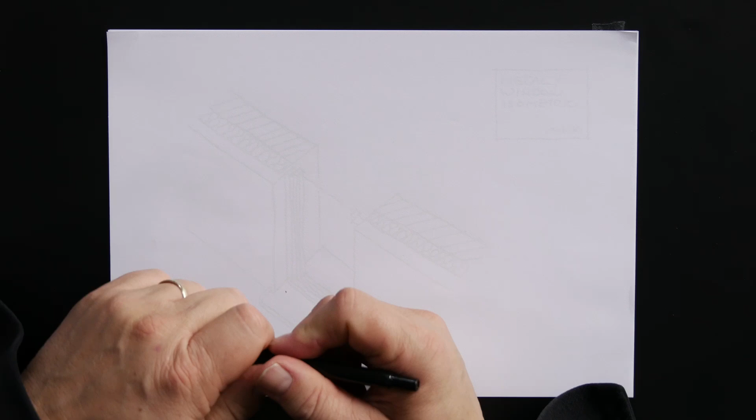So where are we? Who are you? Oh, we are in Politecnico di Milano on a rainy day, unfortunately, but it's fun. Also with a guest. We have your dog here, I think. It's now coming also to visit us. It's going to take a look.

Yes, please. So I'm Enrico. I am a professor here about buildings, and we can say that I'm quite interested in building physics. So that's why Professor Knaack wants to show me something. It's a surprise, but I will see what he wants to show.

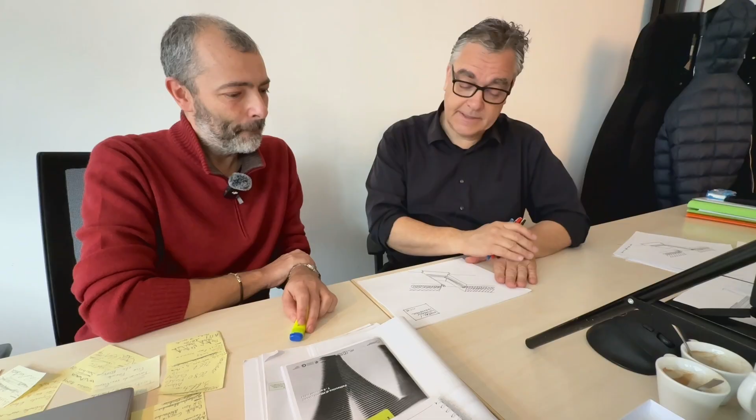Now, yeah, we designed this, and now I need to have expert comments to secure that our systems do work. Okay. And what we designed is a window ventilated metal cladding system. So we have a main wall with some metal cladding and a window being integrated. And I need to see if this building physics works well. You get the colors, you get the opportunity to correct where it's necessary.

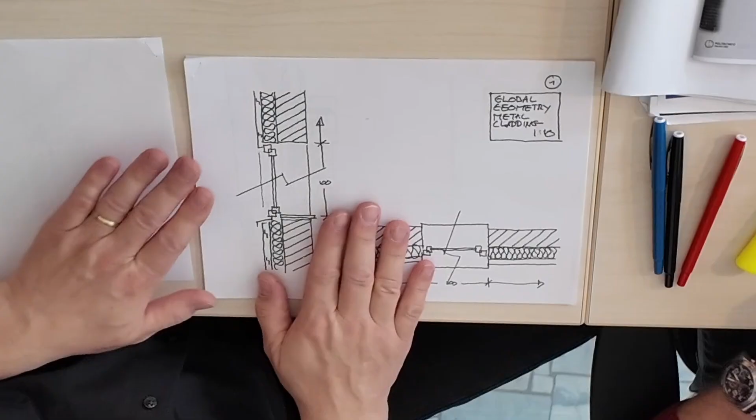And we started with this global geometry, floor plan, section. You see the windows being positioned somewhere close to the insulation. I hope we did that well. You need to comment. And then we go into details. These are 3 different materials. We have the aluminium, the wood, and the plastic version. I took them from the shelf, from the catalogs, and I'd like to see your comments on the systems.

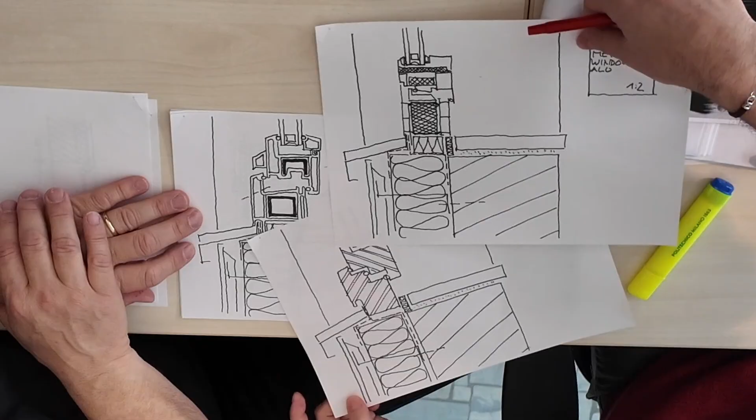Yes, it's quite interesting because I can see that, for example, in all the 3 drawings that we have here, the producer has highlighted some points. We can see here, here, here, and also here. We have gaskets that are really crucial for the air tightness, water tightness. We can talk about rain. And also, because of air tightness, they work really well in terms of thermal insulation, because if the air doesn't go from outside to inside, we are quite safe.

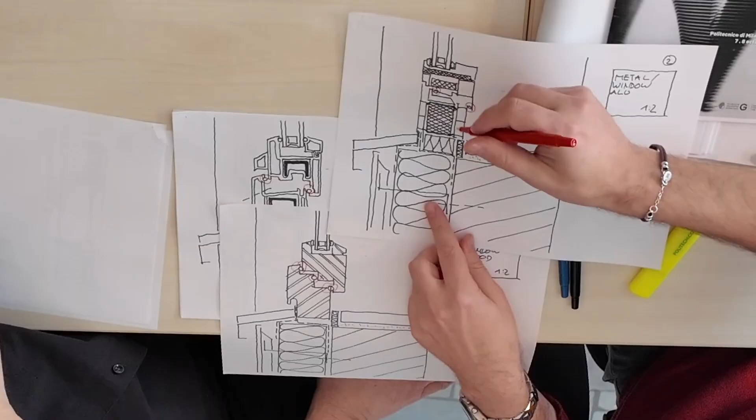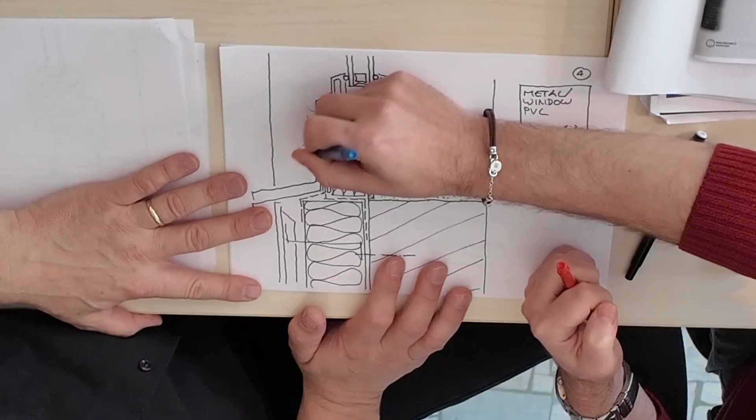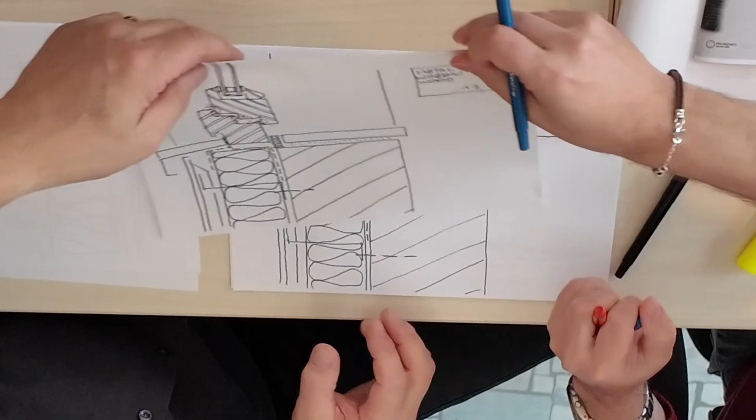But there are also different systems of windows. We can see that, for example, this is an open joint window, and so it's crucial because of the pressures in the different parts of the chambers. So water that can finally arrive in this gap can go out straight. So it's really a good solution, because if, for example, we take the wooden one where air tightness and water tightness are only related to the gasket, what happens if there is water and these are failing? Water is coming inside, and so the open joint is a really good solution.

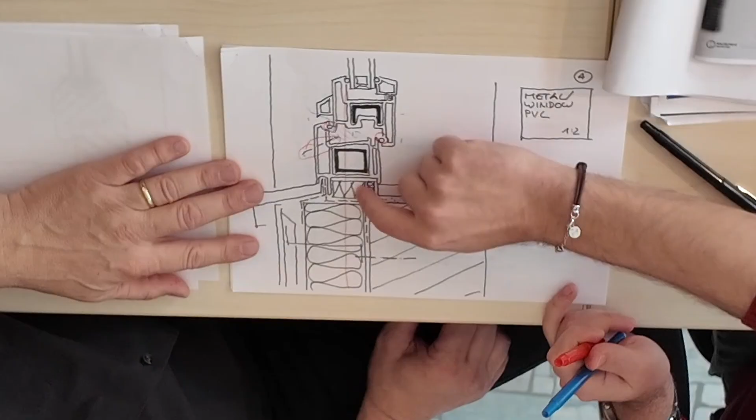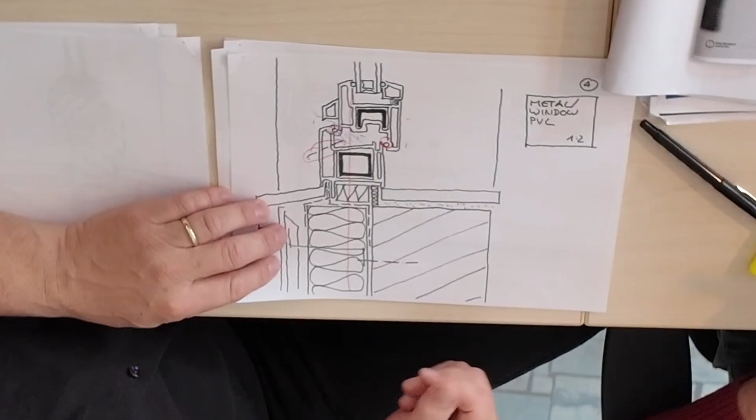We can also see that, for example, here we have a really good thermal line. So there is the thermal insulation of the wall that is in line with the thermal breaks of the window, and also with this special piece of insulation that I think you put because of the thermal bridge and because of air tightness and thermal control, right? This comes from the system of the window supplier. This comes from the system of the wall, and then this interface needs to be locked. Yes. And this is where you end up having a compressive band in position to secure it.

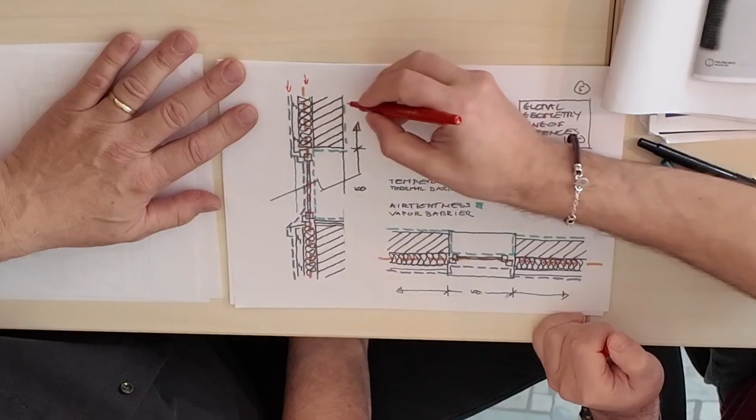Quite interesting. Now, this is for sure your topic. Yes, this is what you love. What I love, I work with this almost every day, and I see there are 3 different levels. One is related to water, one is related to the thermal control, and one is related to the vapor control. So this is crucial because, for example, in this way we can avoid any problem with condensation, especially if there is also a good thermal line.

And at the same time, we can say that all the 3 barriers should work really well, because if only one doesn't work, we failed. So it's not that we have 2 and so we are safe, but we need all 3 working in the proper way.

In the details later. Happy to see. Yeah. So this is vertical, this is horizontal section. Yes. You see that this finds its position. And now I'm digging into the details itself.

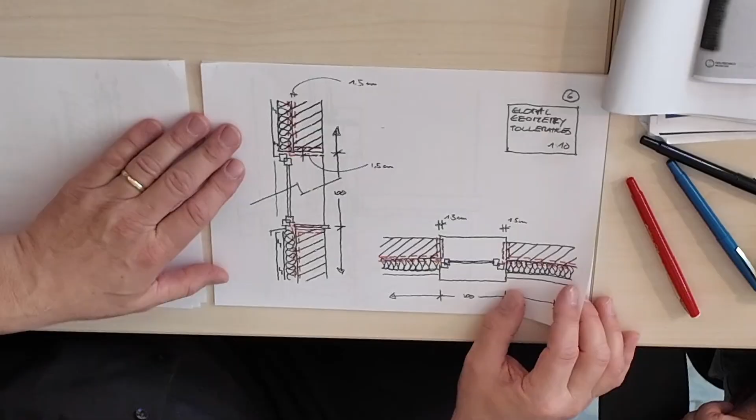No, first, tolerances. The tolerances are really important, because if you have these gaps too big or too small, it's not possible to have a proper barrier related to thermal, to air tightness, and also water. Which means if this is more than 3 centimeters, I may have a gap, and I'm not able to tape it, because tape is not made for a 3 or 4 centimeter gap. It's made for a 1.5, 2 centimeter gap. Yeah. Okay. So if you have something that is more, it doesn't work well.

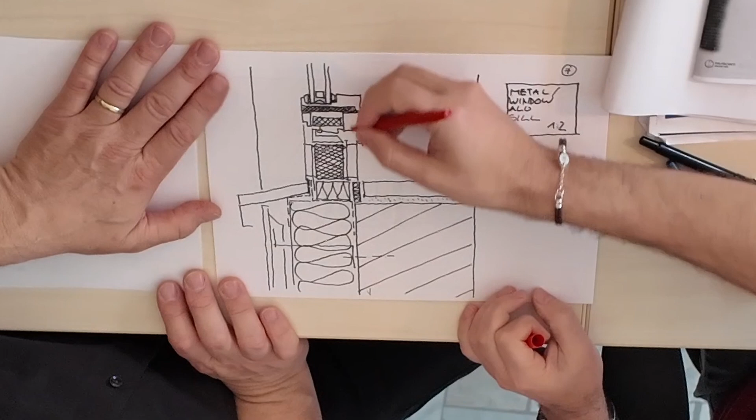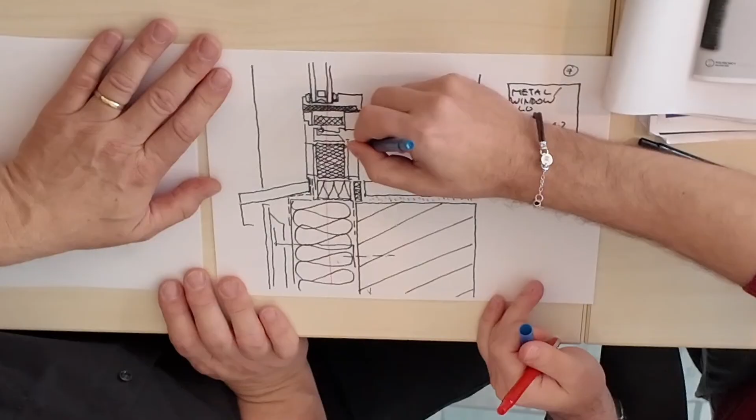Right, now the details. Lines of defense in such a detail. Did it work well? Yeah, we can see, for example, the thermal one is really well done. So thermal break here, thermal insulation here, and this is another thermal insulation piece that can work really well. What about water tightness? If we consider that this works only with 2 gaskets, if these 2 gaskets are fine and well maintained, because in time gaskets can stop working properly, so we have to check periodically if they are good or not.

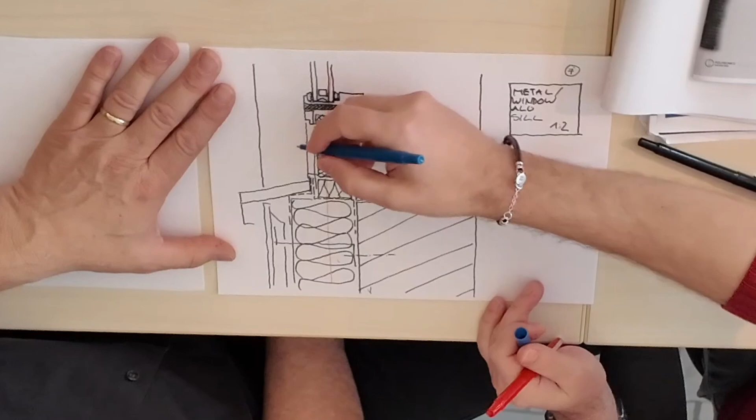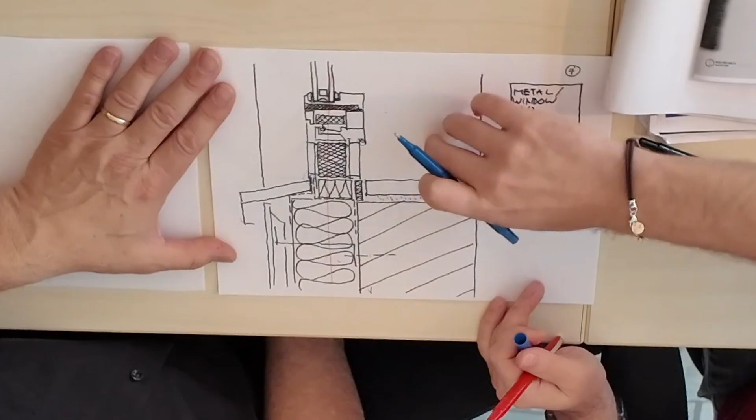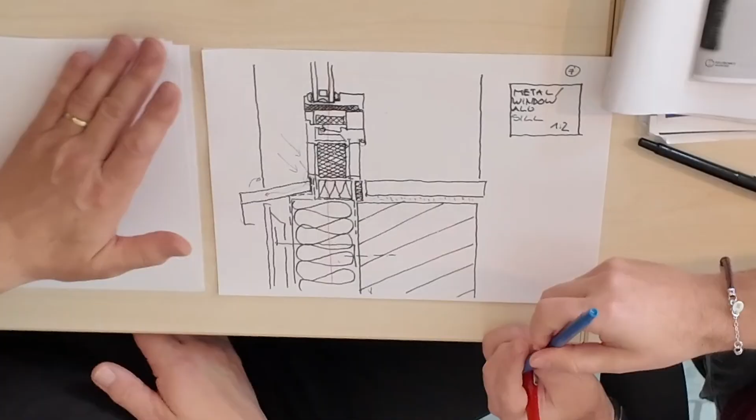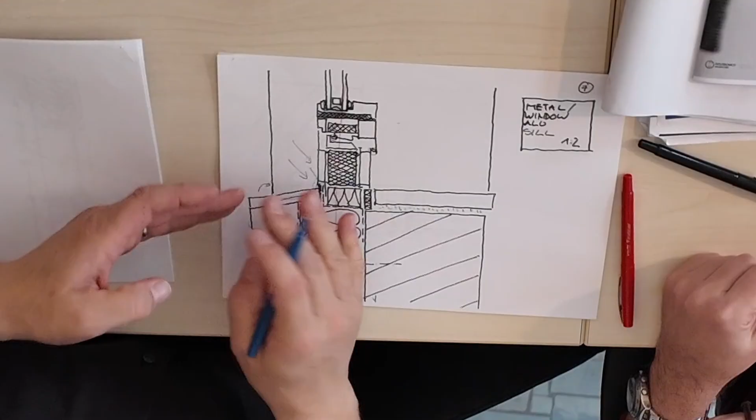The critical point can be here, for example, because here you have a metal sheet that is correct, it goes under the frame of the window, so in this case water coming here can go away and not inside. But we should also consider what happens on the side, because sometimes it's easy to work on the horizontal, but we should also... This is how I envisioned it. So we have drainage here, but we also have the window sill getting below the metal sheet, which means it's supposed to be actually like this. So that's getting at the back. So this is the right sides and right shape of this metal sheet.

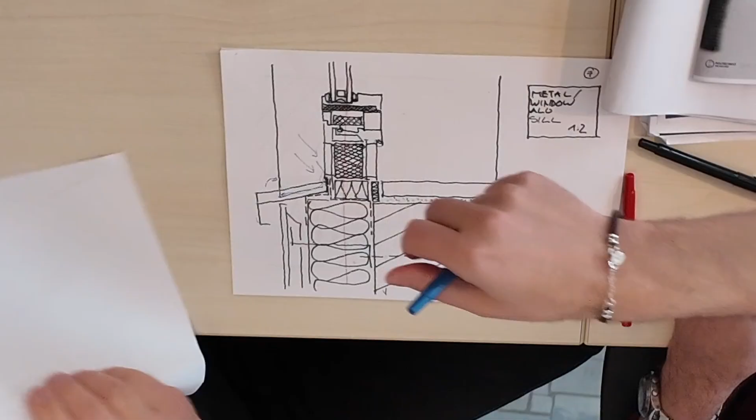And if you go back to the other detail, I see that also here it's really interesting because the metal sheet is going vertical, and it's also good because here you can have dust, and when it rains, if you don't have this, all the dust can go on the facade and mark it. Yes, marks. So this is really well done. Okay, thank you. Okay, this is the vertical one. Now we go to the horizontal one.

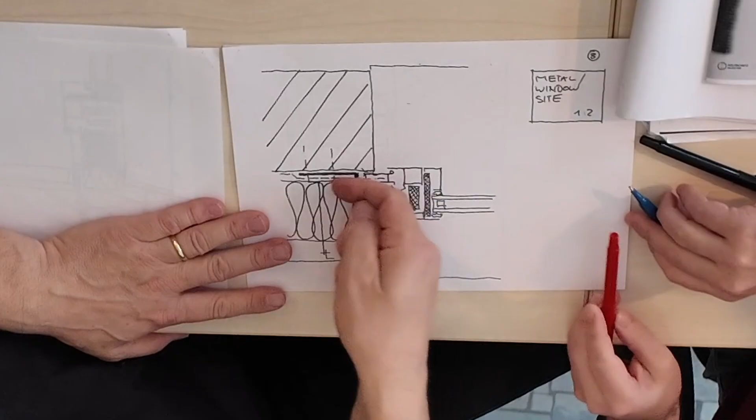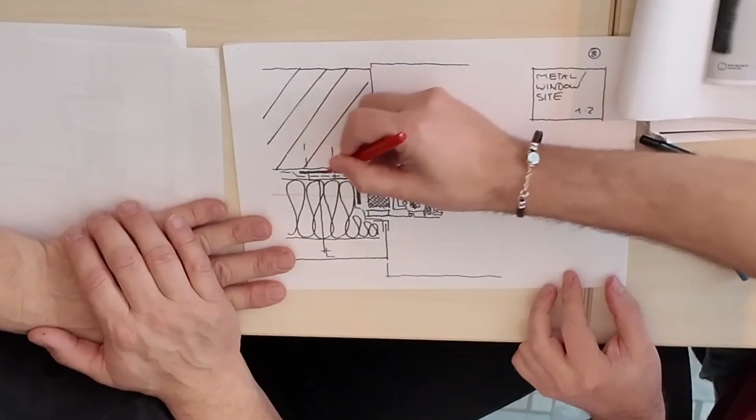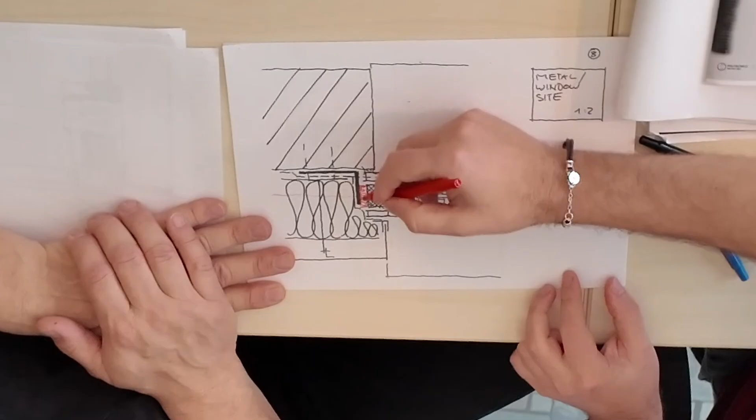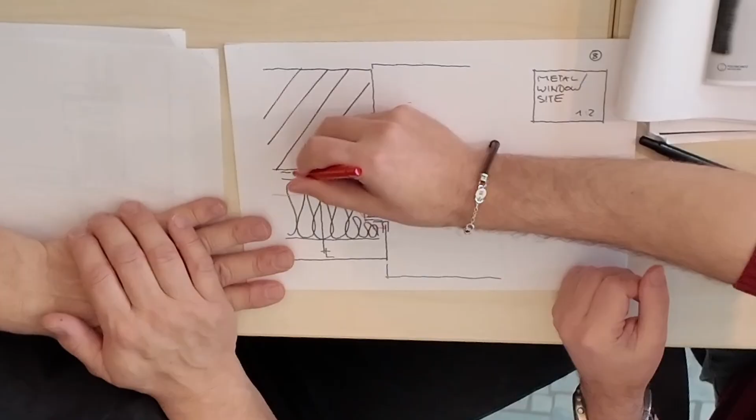This is where I need to fix the window with these brackets, 2 screws, 1 screw from the aluminium system, and now I need to seal that whole thing. Yeah, for thermal we are quite fine, except that I can't see anything between this metal sheet and the window frame. So here you would actually like to add some tape that can be compressed and also fill the gap. And this is also good to control the vapor migration from inside to the outside, because this is our vapor barrier. But what happens here if I don't have...

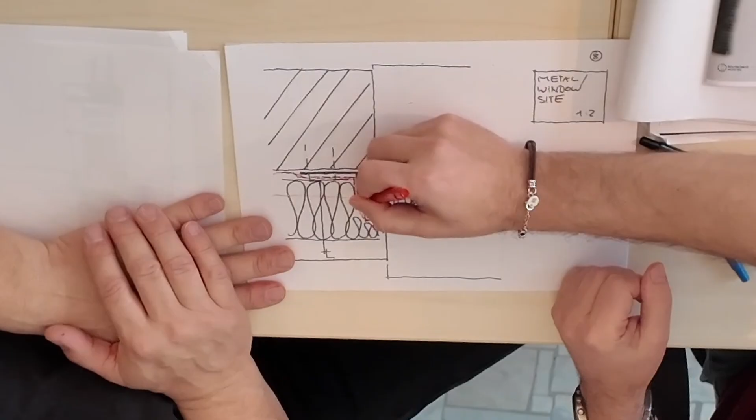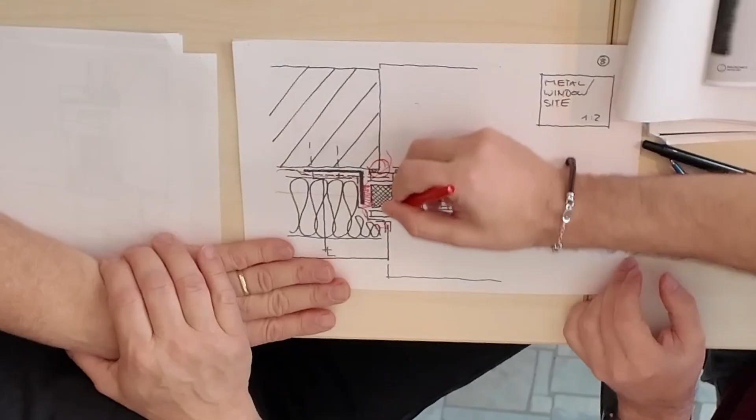If the dew point is too low... It is too low and this is not working properly, I can have condensation here. So that's why I need to insulate. And we have this sealant in an important position. Yeah. Okay. This sealant, and then we should also consider what happens here. Because this I can see is a metal sheet, and here you have this tape that goes on the frame, metal, and then you have this.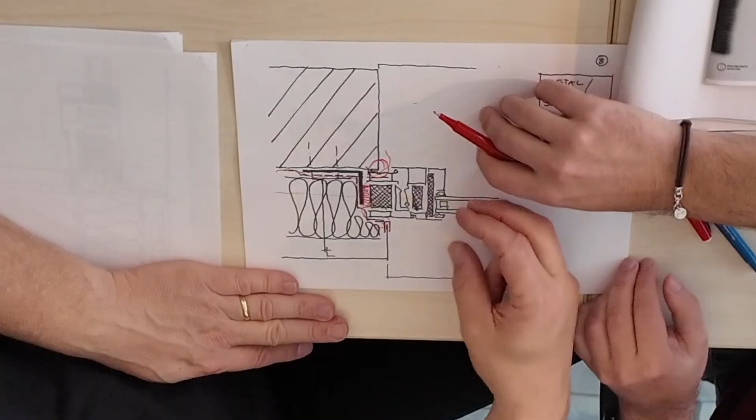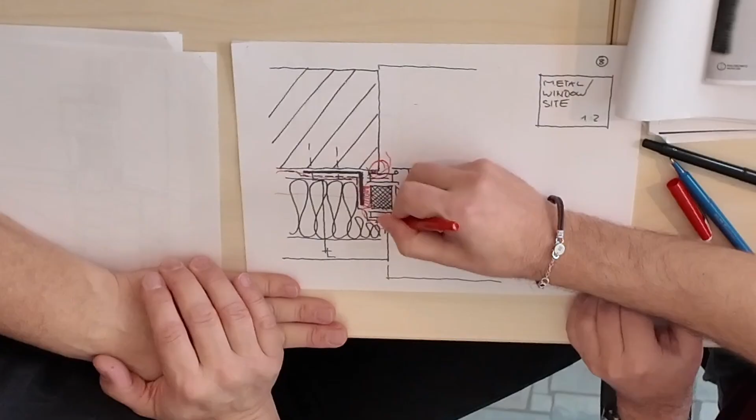And then there's this L-shaped bar fixed to the aluminium system, which then covers that one. So I envision the window is brought into position, then I tape it, then I close it with insulation, and then I close it with... So this is something that goes here, fixed here. Fixed there. Consider that if you fix it, then you have some points where your vapor barrier has a hole.

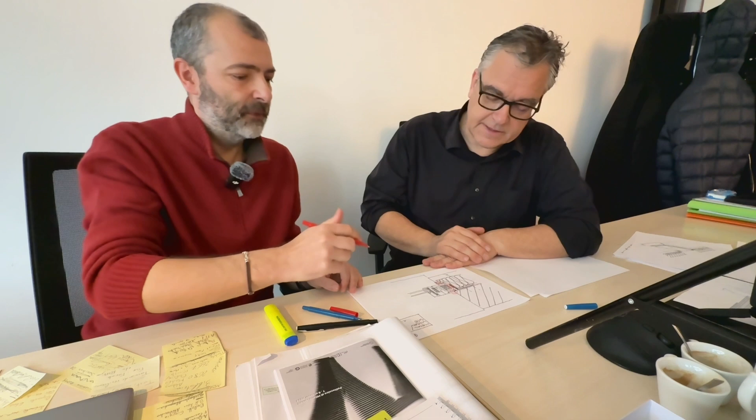True, but then the inner aluminium system closes. Yes, that's necessary. Okay. Now we go to the top part. It's the same detail, same system, same kind of sealant. Yeah, I can see, for example, here also we have always this, that is a good sealant.

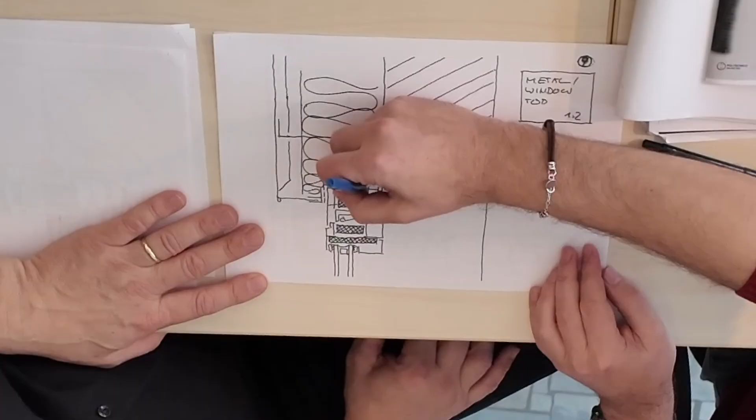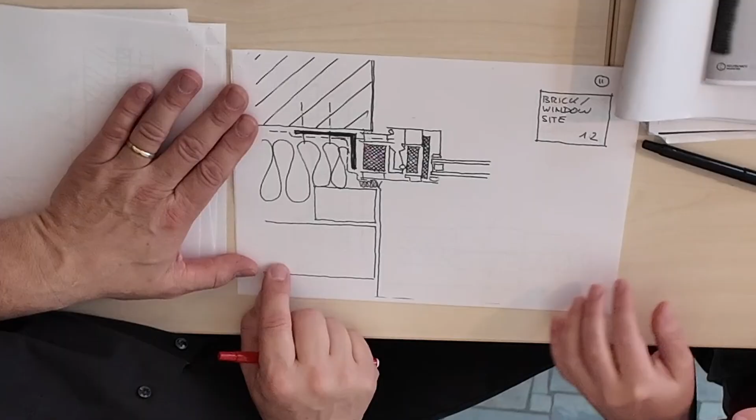But also here we don't have anything, so we should introduce something. We need to insulate here, and we need to add this one here. Yes, makes sense. Right. This is the metal aluminium setting, and now we did the same in brick. With the brick detail, it's the same aluminium piece, same gasket, same fixing. Same as before. Here we have good thermal.

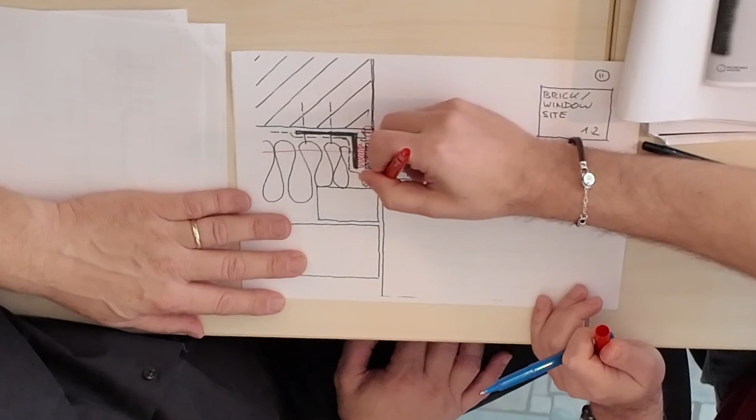You can see that everything is working in a proper way. We have one sealant outside, one inside, and it's fine. Also here we miss this. Yeah, you're right. And we have also to control the size of this, because in this drawing we can see that there is a sealant like this.

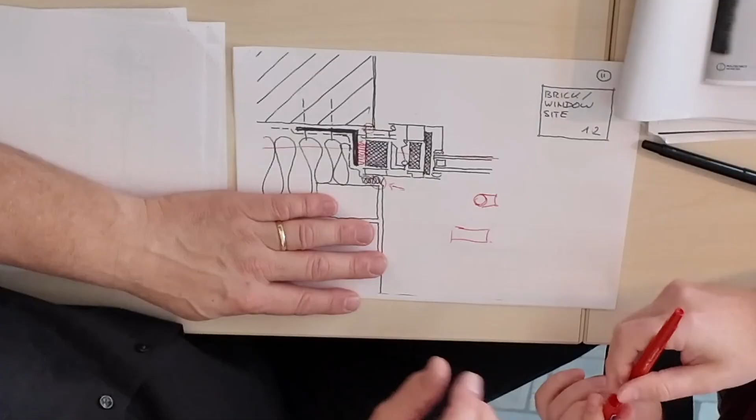But the dimensions of the sealing are not the proper ones, so I think it's better to introduce a specific element and then do a sealing, so it works with the right proportion. So we have the inner aluminium, we have the bricks, and then this silicone with a different dimension, and then the rope at the back to secure that it doesn't get too deep.

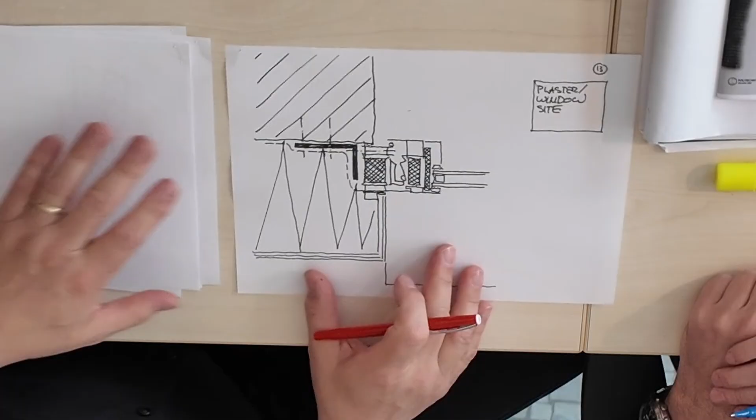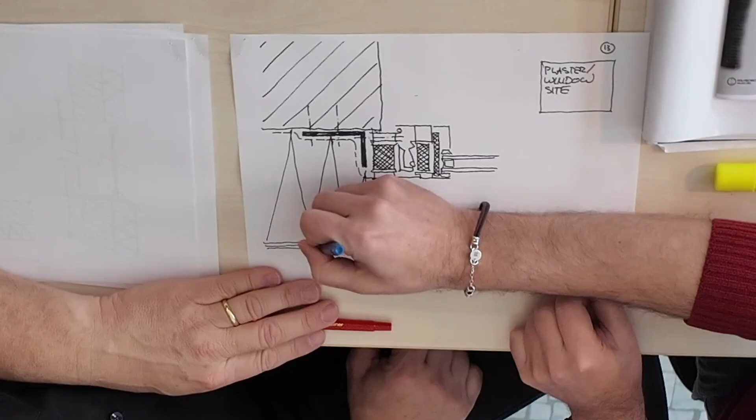We have a solid foam to be positioned. And when I think about it, fixing the gasket and then adding the foam, that's actually the way we need to do it. Yes, but here we are in a different situation. We have seen that, for example, here there is a really thin plaster. And if we consider what we said at the beginning, that this metal sheet should then go under

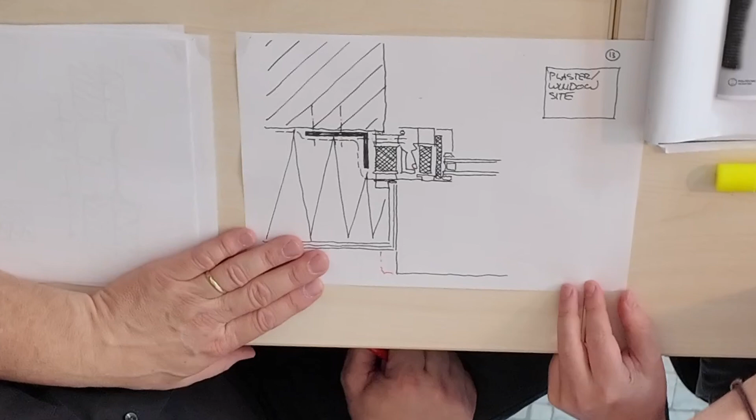the... Right, I need to go there, also because it's quite important. Also, the question is, where do you stop it? Because it can be behind this, but then you can't finish the metal with the plaster because it doesn't stay. So sometimes it depends. We stop the finishing with the plaster on the front side, and then we work also here with metal.

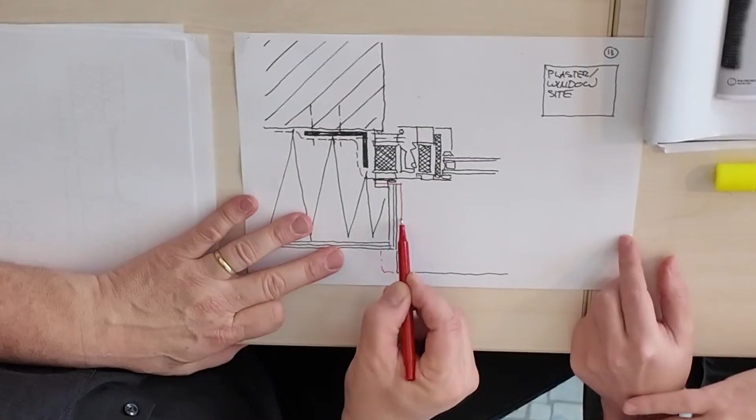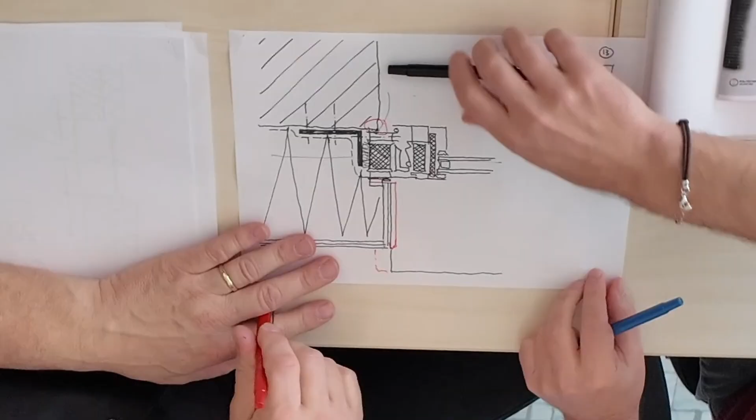I see. So an alternative piece of metal here. That can make it easy to adjust. Yeah, you're right. That may help. If we consider instead the thermal, also here we are in a really good situation. About the sealing, the vapor barrier, as in the previous one, we also have to put this here. And then sealant here, and also here, and then the fixing of the sealant.

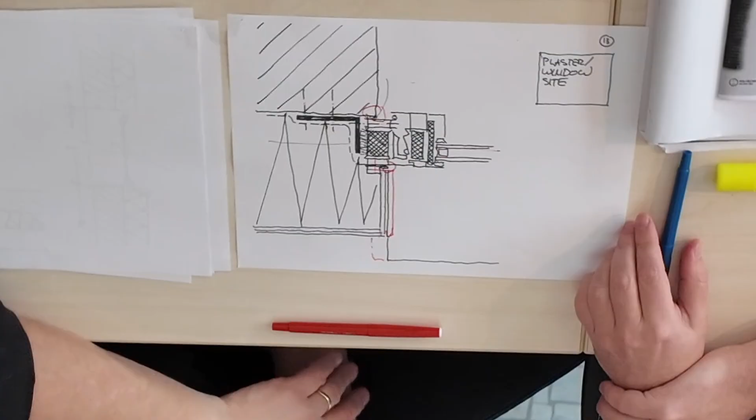Then there is another point that we can discuss. It's about how this window is fixed to this structure. Right now we have these brackets, three of them, so by that the window itself is fixed to the main system. But any screw, for example? Yeah, there's a bracket, the screws here, and then there's a screw here, at the back side, behind the thermal break.

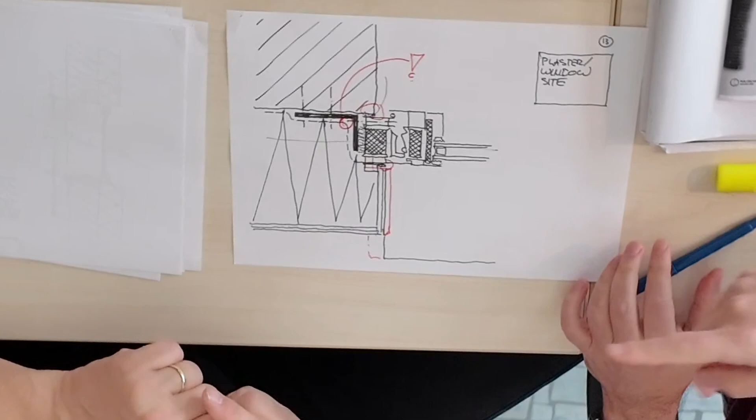Because we have also to consider that in some points these screws can break, interrupt the vapor barrier. I see. So this is a dangerous situation. So that the screw doesn't break my vapor barrier. Yes, it should be controlled. Also this. I get your point.

Thank you. You're welcome. It's a pleasure. Thanks.